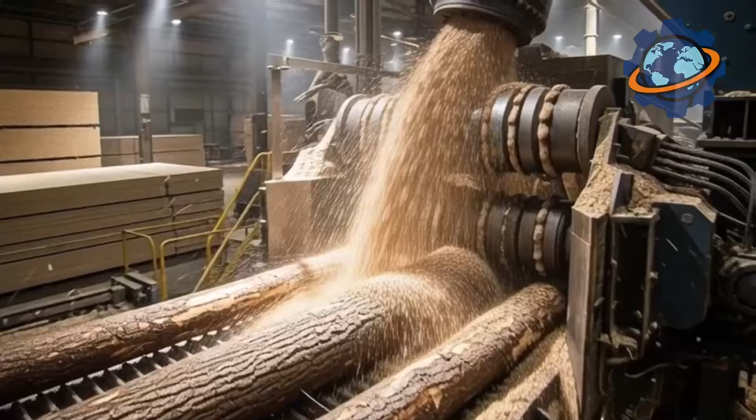Tear open your wall. Behind the drywall sits engineered wood, either plywood or OSB, oriented strand board. They look completely different yet serve an identical purpose. Plywood: smooth layers of thin wood stacked like pancakes. OSB: a chaotic jumble of wood strands compressed together.

North American construction consumes 30 billion square feet annually, enough to cover Rhode Island 50 times over. One panel costs $12. The house surrounding you required 300 panels minimum. How does a round tree trunk become a flat sheet stronger than solid wood? Why did ugly OSB nearly kill beautiful plywood?

Stay with us. You'll witness the violent beauty of spinning logs becoming continuous wood ribbons and discover the counterintuitive secret. Wood is stronger when you destroy its natural structure.

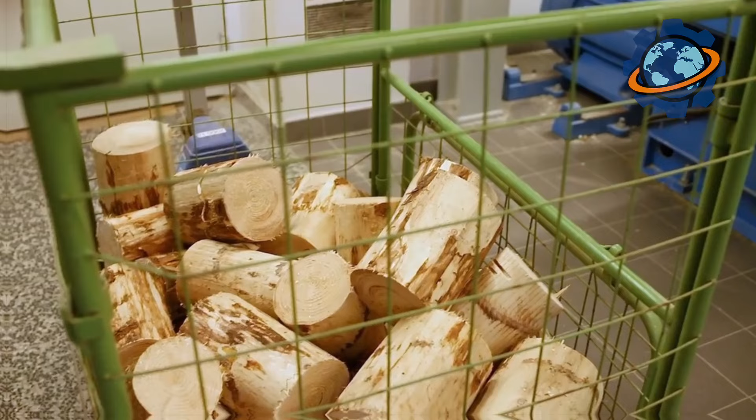The mill dominates the landscape, a facility processing 1 million board feet daily. Log trucks arrive continuously, each hauling 40 tons of Douglas fir or southern yellow pine. The debarking drum, 60 feet long and 10 feet in diameter, rotates like a giant clothes dryer. Logs tumble inside while high-pressure water jets at 3,000 psi blast bark away. The noise resembles a continuous explosion. Workers wear double hearing protection.

Watch the veneer lathe operation. A peeler lathe grips 8-foot logs at both ends, spinning them at 200 RPM while a knife blade, sharp as a surgical scalpel and wide as the log, shaves a continuous ribbon of wood. The veneer peels off like a paper towel unrolling, emerging as a sheet 1/8 inch thick and hundreds of feet long.

20 workers monitor 12 lathes simultaneously. One operator explains, "Log spins, knife stays still. Physics does the work. We just remove what breaks."

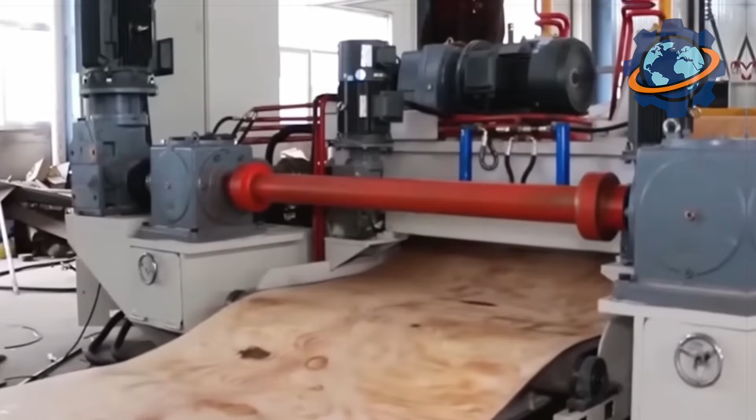The veneer ribbon, still damp from the tree's moisture, feeds through dryers, conveyor ovens stretching 300 feet. Temperature reaches 350 degrees, reducing moisture from 50% to 6% in 8 minutes. Dry too fast, the veneer cracks. Too slow, production bottlenecks. Sensors monitor moisture content constantly, adjusting heat and speed automatically.

After drying, veneer gets clipped into precise sheets, 4 feet by 8 feet, the industry standard. Automated clippers cut at speeds exceeding 1 sheet per second. The clipping produces massive waste. 30% of veneer becomes scraps. But nothing is wasted here. Those scraps feed directly to the OSB plant next door. The integration is complete. Plywood's waste becomes OSB's raw material. One tree enters, 2 products exit.

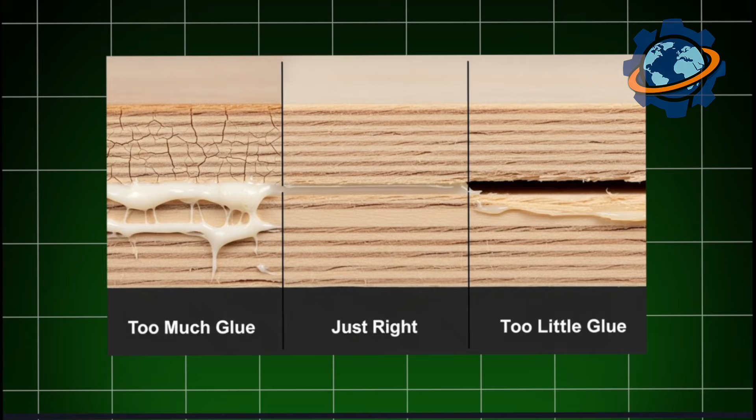Glue application transforms loose veneer into plywood through chemistry. Phenol formaldehyde resin, a waterproof adhesive surviving decades of weather exposure, gets sprayed onto veneer surfaces. The glue spreads microscopically thin, just 0.02 of an inch. Too much glue costs money and creates brittle joints. Too little, the plywood delaminates under stress.

The layup process stacks veneers perpendicular to each other, grain directions alternating 90 degrees between layers. This cross-grain construction is plywood's genius. Solid wood splits easily along the grain but resists splitting across the grain. By alternating grain directions, plywood eliminates directional weakness. A 5-ply panel, 5 layers total, achieves strength in all directions that solid wood can't match. The stacked sheets, still unbonded, go to the press.

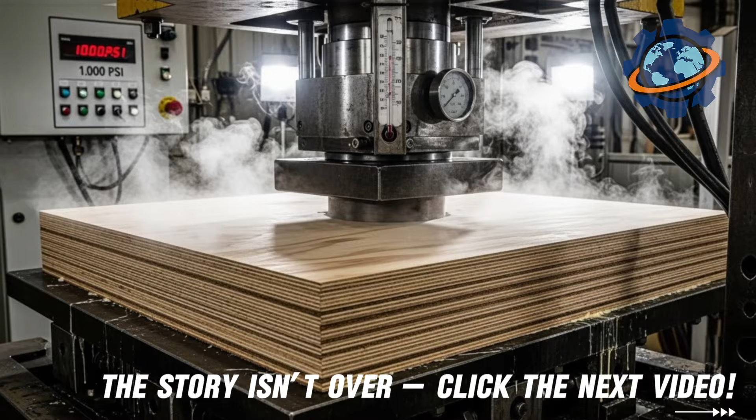The hot press is where plywood is born. A massive hydraulic press, 40 feet square, contains 30 openings stacked vertically. Each opening holds 20 plywood panels. Workers load 600 panels simultaneously, 12,000 square feet entering the press at once. The platens close, applying 1,000 psi pressure while heating to 290 degrees.

Under heat and pressure, the phenolic resin undergoes chemical cross-linking, molecular chains bonding permanently. The process is irreversible. Once cured, the glue can't melt again. Press time varies by thickness: 3 minutes for 1/4 inch, 12 minutes for 3/4 inch. When the press opens, steam erupts as residual moisture flashes. The panels emerge hot, rigid, transformed. What entered as loose layers exits as a single engineered unit, stronger than the tree it came from.

OSB manufacturing begins differently, with destruction. Instead of peeling veneer, trees get shredded. The strander machine uses a rotating disc containing hundreds of knives. Logs feed through, emerging as strands: thin rectangles 6 inches long, 1 inch wide, 0.025 inches thick. The violence is spectacular, logs disintegrating into thousands of pieces in seconds.

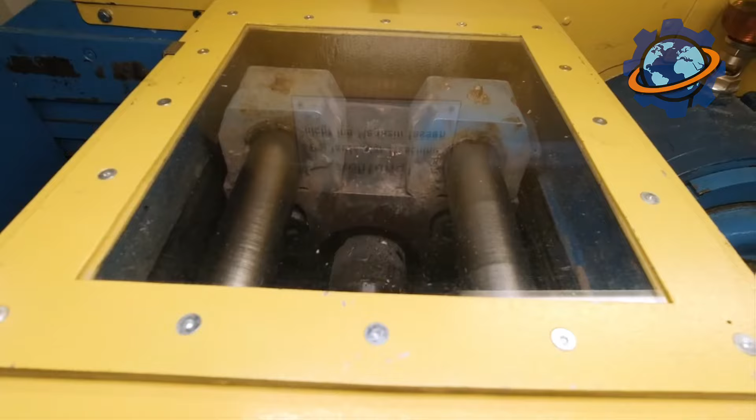These strands dry similarly to veneer but require less precision. Moisture content targets 8%. The dried strands get coated with wax and resin, different chemistry than plywood. OSB uses MDI, methylene diphenyl diisocyanate, bonding faster and cheaper than phenolic. The coated strands look like wood chips covered in syrup. They feed to forming stations where magic happens. Orientation.

Orientation differentiates OSB from random particle board. The forming line uses electrostatic alignment or mechanical orientation systems, forcing strands to lay parallel in outer layers, perpendicular in the core layer. This mimics plywood's cross-grain structure but achieves it through chaos rather than precision. Picture billions of wood strands, each finding its place in a three-dimensional puzzle.

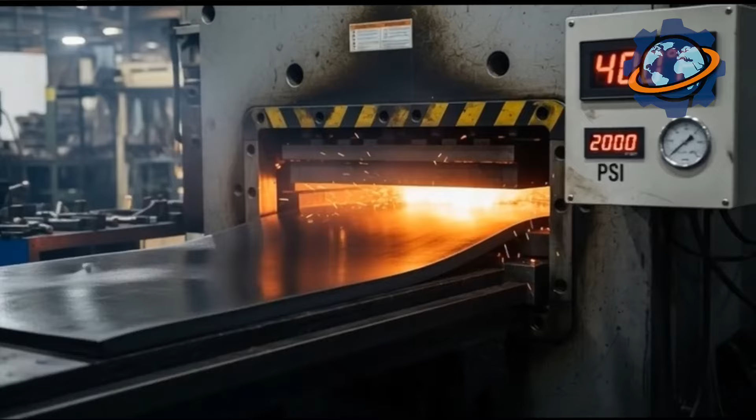The mat, a loose collection of oriented strands 8 inches thick, enters the continuous press. Unlike plywood's batch press, OSB uses a continuous process. The mat feeds into a press heated to 400 degrees under 2,000 psi pressure. As it travels through, thickness compresses from 8 inches to 7/16 inch while resin cures. The panel exits as a continuous ribbon, cut to length by flying saws. Production speed reaches 60 feet per minute, one 4x8 panel every 8 seconds.

Plywood originated in ancient Egypt. Archaeologists found plywood furniture in King Tutankhamun's tomb from 1300 BC. Modern plywood production began in 1865 when Immanuel Nobel, father of Alfred Nobel, developed rotary lathe cutting continuous veneer.

World War II accelerated development. Plywood construction enabled Mosquito bombers, proving engineered wood could replace scarce aluminum. OSB emerged in 1960s Canada as a solution to a log supply crisis. Small diameter trees and branches, unsuitable for veneer peeling, worked perfectly as strands.

Armin Elmendorf at Elmendorf Research created the first commercial OSB in 1978. Initially dismissed as a cheap substitute, OSB gradually proved equal or superior performance at lower cost. Today, OSB outsells plywood 3-to-1 in North American construction. The ugly duckling became the swan.

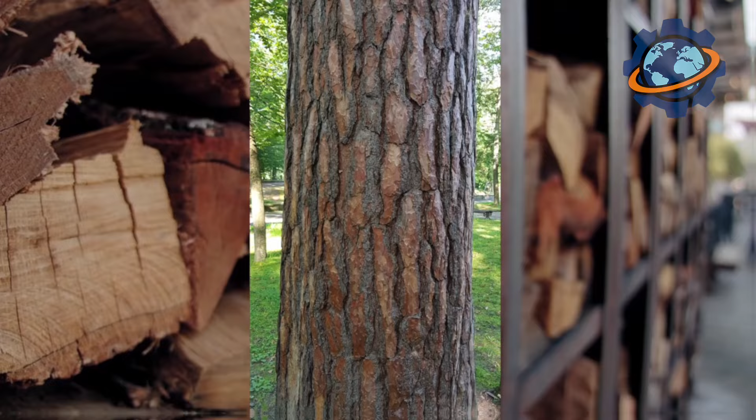Carbon emissions comparison favors engineered wood dramatically. Producing plywood or OSB generates 80% less CO2 than steel framing equivalents. Both products sequester carbon. The wood stores atmospheric CO2 for the building's lifetime. Industry plants 3 trees for every one harvested, making this a genuinely renewable material.

Here's the secret we promised. OSB dominates because it's democratized wood. Plywood requires perfect logs: large diameter, straight grain, minimal knots. Only 15% of logs qualify. OSB uses everything: crooked trees, small diameter, branches, plywood scraps.

The random strand orientation means defects disappear into the aggregate. That gnarly branch causing plywood failure becomes invisible in OSB's chaos. We learned that destroying wood's structure, cutting it into strands and reassembling randomly, creates a stronger, more consistent product than respecting its original form. From forest to framing, the cycle completes.

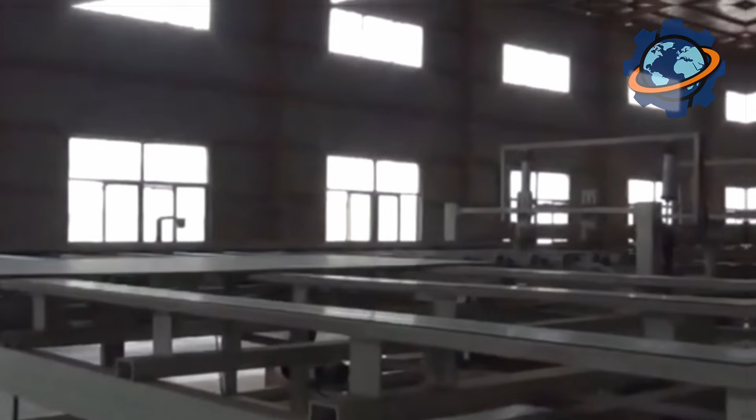We've engineered materials stronger than nature, provided by accepting that perfection comes through controlled destruction. That wall surrounding you isn't wood anymore, it's wood reimagined. It's fibers oriented and bonded beyond biological limits.

Plywood taught us to slice and stack. OSB taught us to shred and randomize. Both taught us that human engineering can improve on millions of years of evolution when we stop trying to preserve what nature made and start rebuilding it our way.

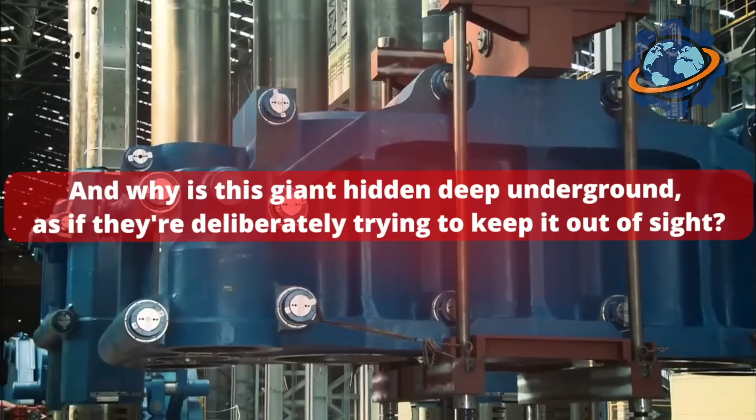A machine capable of squeezing metal like it's alive, not melting it, not breaking it, but forcing it to flow under pressure that's impossible to imagine. 80,000 tons of force concentrated at a single point. That's more than the weight of an entire army of tanks stacked on top of each other. But why does humanity need such inhumane power? And why is this giant hidden deep underground, as if they're deliberately trying to keep it out of sight?

Under this press, they're not just making metal parts, they're forming the heart of airplanes, rockets, and reactors without a single welded seam. But there's one fact almost never discussed publicly. If you watch till the end, you'll understand why this press isn't an engineering marvel, but a tool of global dominance.

How much is 80,000 tons? Just to put that in perspective, that's the equivalent weight of 80,000 cars compressed into a single point, or the pressure created by an entire army of giant elephants stacked on top of each other. This metal colossus, installed in 2013, is the world's most powerful forging press, surpassing all previous achievements.

It's a true giant, reaching the height of a 10-story building. Its foundation is buried deep in the ground, while its upper section rises into the sky like an industrial skyscraper. It looks like a machine from a science fiction movie, but it's absolutely real and performs its incredible work every single day.

This press is designed for stamping extraordinarily large and complex parts that are critically important for the aviation, aerospace, and energy industries. These can be massive panels for rocket bodies, huge wing or fuselage components for aircraft, turbine parts for power plants, or even reactor equipment.

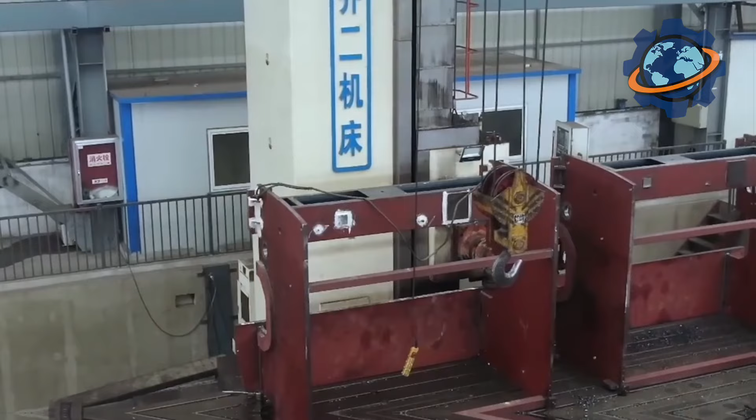The story of these giant presses is its own epic saga, deeply intertwined with the Cold War era. Back when the USA and USSR were competing for dominance in the space race and military industry, there arose a need for super strong, seamless metal structures. The Americans were first to build presses with a capacity of 50,000 tons, allowing them to create large aircraft components without welds, drastically improving reliability.

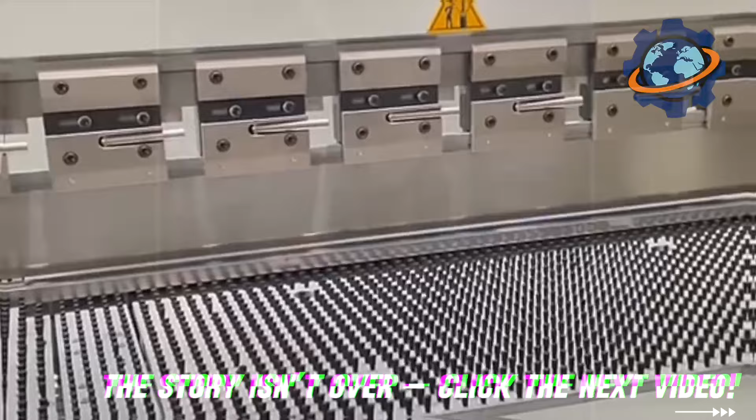The Soviet Union wasted no time responding, creating an even more powerful 75,000-ton press that also became a legend of engineering ingenuity. These titans of their time represented the pinnacle of metallurgical technology, symbols of engineering superiority and the industrial might of superpowers. They were true monsters, capable of shaping metal with such force it seemed almost impossible.

But this modern Chinese press shattered all those records, surpassing even the Soviet giant. It can crush metal with literally superhuman force. Under this press, red-hot metal blanks weighing hundreds of tons, that's like dozens of trucks compressed into a single chunk of metal, get flattened like soft clay. Metal heated to a red or yellow glow undergoes incredible pressure. It doesn't just deform, it flows under this colossal force, slowly but relentlessly taking on the required pre-designed shape.

This isn't casting, this is forging, a process that strengthens the metal structure, making it denser and stronger than any cast piece. This ability to produce solid forgings of enormous size is the main advantage and defining characteristic of such presses. Picture this. You can get a massive spar for an aircraft wing or a reactor vessel component without a single weld.

Weld seams, no matter how high quality they are, will always be potential weak points in metal structures. They can be sites of stress concentration, cracks, or corrosion. In mission-critical components, where the cost of failure can be catastrophic, say in an aircraft at 33,000 feet, or in a space rocket, the absence of weld seams isn't just desirable, it's absolutely essential. Solid forgings, formed under such pressure, have unmatched strength, uniform structure, and maximum reliability. They're the foundation for building supersonic aircraft, ultra-powerful rockets, spacecraft, and safe nuclear reactors.

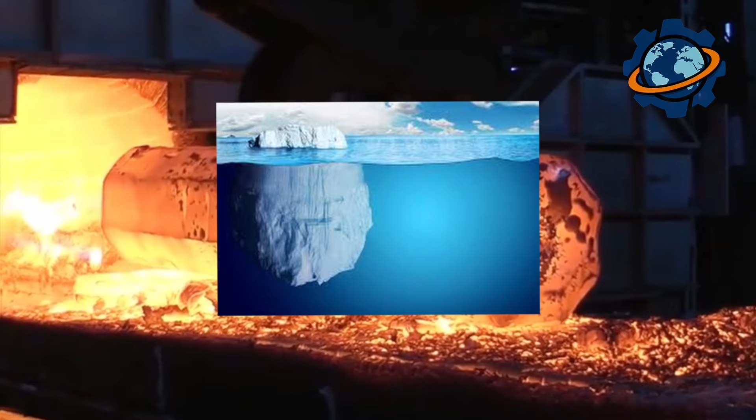To install a press of this magnitude, you don't just build a foundation, you build an entire underground iceberg. The main structure of the press is buried deep in the earth because the enormous forces acting during forging create incredible vibrations that need to be absorbed. It's like building a foundation for a skyscraper, but in reverse, plunging into the depths of the earth for dozens of feet. Installing equipment like this is a more complex logistical operation than launching a space rocket. Press components arrive on site by the hundreds, then get assembled using giant cranes and engineering teams working for years.

By the way, an 80,000-ton press force isn't just pressure, it's a controlled transformation of material at the micro level. Under that kind of force, the metal's crystalline structure changes. Grains become finer and denser, giving it exceptional mechanical properties. It's like leveling up metal to maximum stats.

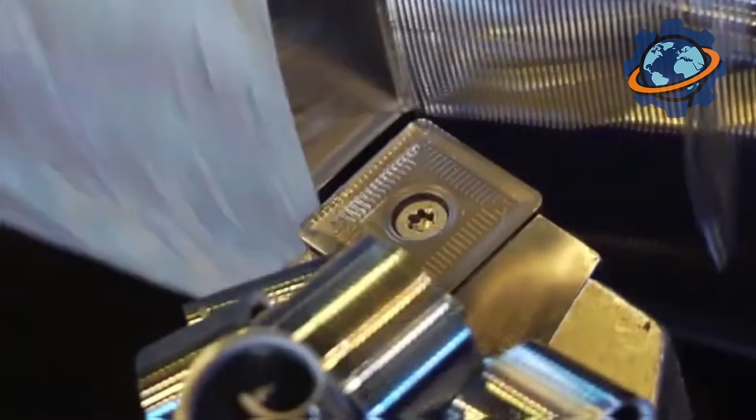Here's another thing. Running a giant like this takes a colossal amount of energy. This isn't just plug it into an outlet. Powering the hydraulic pumps and maintaining stable pressure requires a dedicated power plant. And the cooling systems that carry heat away from the hydraulic fluid, just as critical. Under these loads, the oil can get seriously hot. It's a true engineering ecosystem where every single component is mission critical for the entire complex to function.

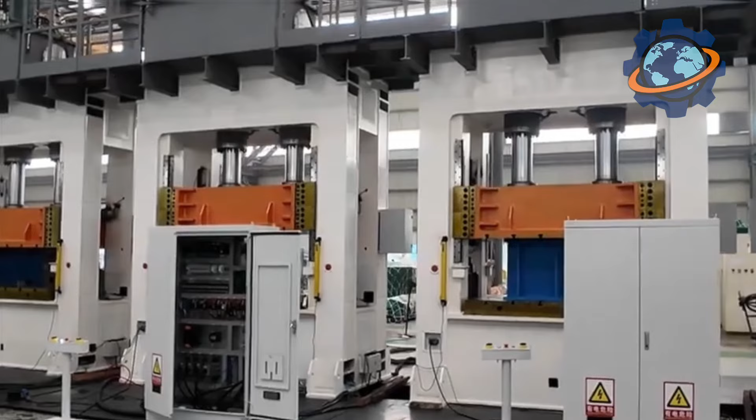As we mentioned, instead of welding together dozens of small metal sheets, the press can forge a significant portion of the shell from a single block of metal. This makes the structure lighter, stronger, and far more resistant to fatigue. While the press doesn't stamp out tiny turbine blades, it can form large casing components for jet engines, parts that withstand extreme pressure and temperature.

Beyond aerospace, where every single pound and every hairline crack can spell disaster, this press also stamps out components for nuclear and thermal power plants. We're talking ultra-high-strength reactor housings and lids, turbine elements, generators, and other equipment operating under extreme pressure, temperature, and radiation. Here, integrity and zero defects aren't just about efficiency, they're about protecting entire regions.

They also forge shafts and rotors for massive ships and industrial machinery. Enormous turbine installations on ocean-going vessels or in power generation require ultra-strong shafts that can handle colossal rotational forces and torsional loads. Forgings made under this press are perfectly suited for these purposes.

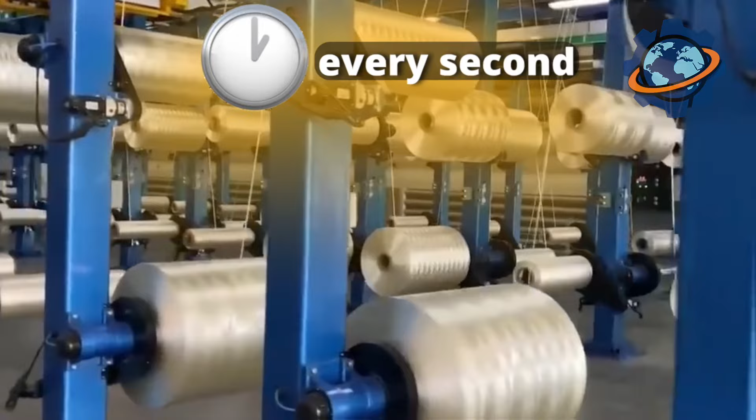Every second, factories worldwide produce carbon fiber threads 10 times stronger than steel, yet 5 times lighter. Picture this. A strand thinner than human hair supports weights exceeding 400 pounds, more than 2 adult humans hanging from a thread, invisible at arm's length. These black filaments, woven into composites, form radar-invisible bombers, Formula One monocoques surviving 200-mile-per-hour crashes, and prosthetic limbs outperforming natural bone. How does ordinary plastic transform into material stronger than steel through fire?

Why do engineers call carbon fiber the black aluminum, revolutionizing everything from spacecraft to tennis rackets? Stick around till the end. You'll discover the jaw-dropping reason carbon fiber doesn't break like metal but unravels like fabric, why recycling it became a technological arms race, and the shocking truth about what happens inside furnaces hotter than volcanic lava when atoms reorganize into crystalline perfection. The story begins with polyacrylonitrile, PAN fiber, the plastic precursor looking like white cotton thread.

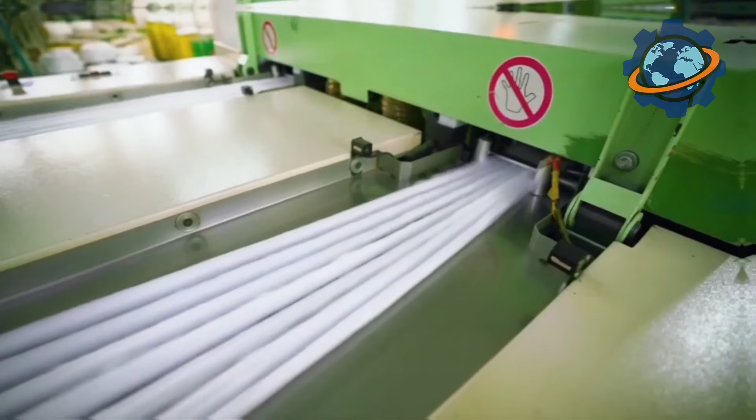Massive spinning machines standing 3 stories tall in climate-controlled facilities extrude molten PAN through spinnerets containing 50,000 microscopic holes. Each hole, measuring 3/10,000ths of an inch across, thinner than blood cells, produces one continuous filament. Picture spider silk production scaled to industrial extremes. These filaments emerge at speeds reaching 3,000 feet per minute, fast enough to cross football fields in seconds.

Chemical baths stretch the fibers, aligning polymer chains parallel to fiber length. This molecular orientation determines everything. Randomly oriented polymers create weak thread. Aligned chains create strength rivaling steel. Workers monitor tension constantly. Variations of 2% cause inconsistent properties requiring entire batches, thousands of pounds worth, to be scrapped. The PAN production facility operates 24/7, producing 50 tons daily, enough fiber to circle Earth's equator if laid end to end.

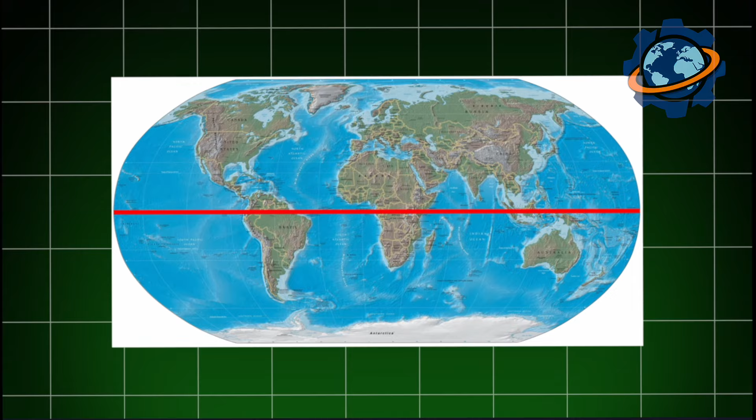Next comes oxidation, the first transformation where chemistry becomes alchemy. Massive ovens, stretching 200 feet long like horizontal tunnels, heat PAN fibers to 500 degrees Fahrenheit in pure oxygen atmosphere. Inside these furnaces, oxygen atoms attack carbon-hydrogen bonds in the polymer backbone. Hydrogen burns away as water vapor, leaving behind carbon-nitrogen ladder structures stabilized through cross-linking.

This stabilization process takes 90 minutes as fibers crawl through ovens on tensioned rollers. Temperature control matters critically. Too hot, fibers ignite catastrophically. Too cold, cross-linking remains incomplete, causing failure during subsequent heating. The oxidation chamber maintains oxygen concentration at 23% with tolerance of 0.5%.

Operators monitor fiber color constantly, watching white PAN transform through yellow to dark brown. That color change represents chemical metamorphosis, polymer becoming something fundamentally different, no longer meltable, now heat-resistant enough to survive temperatures that vaporize aluminum.

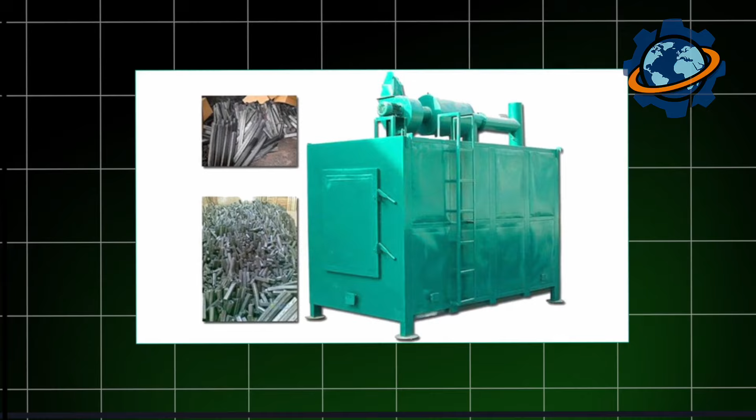Giant carbonization furnaces, operating at temperatures exceeding 3,000 degrees Fahrenheit, complete the transformation. These aren't ordinary ovens, they're inert atmosphere chambers purged with nitrogen gas, creating environments where oxygen molecules cannot exist. Inside this oxygen-free inferno, stabilized fibers lose nitrogen, hydrogen, and other non-carbon elements through thermal decomposition. Only carbon remains, reorganizing into graphite-like crystalline structures.

The process occurs in stages. First, furnaces heat fibers to 2,700 degrees, driving off 90% of non-carbon atoms. The fiber shrinks 25%, density increasing as material compacts. Second stage furnaces push temperatures to 4,000 degrees for graphitization, the process aligning carbon atoms into perfect hexagonal sheets stacked like microscopic playing cards. This crystalline perfection gives carbon fiber its extraordinary properties.

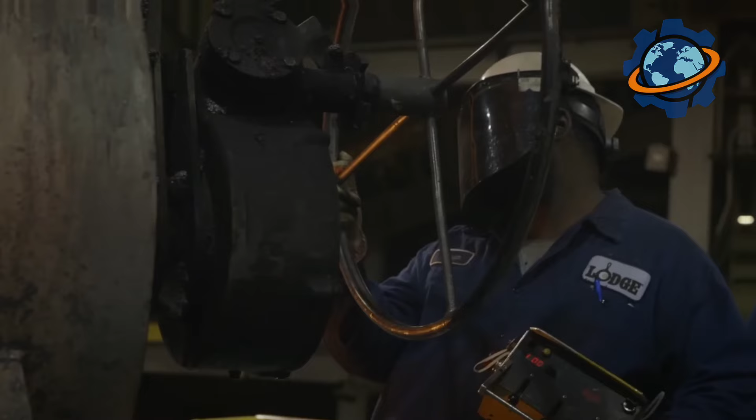Processing takes 3 hours, crawling through furnace sections totaling 1,000 feet long. One power interruption, one oxygen leak, and fibers oxidize catastrophically, burning like magnesium flares, destroying millions in equipment.

Now comes surface treatment, electrolytic oxidation creating reactive sites for resin bonding. The carbon fiber, now black as obsidian and measuring just 0.0003 inches diameter, passes through electrolyte baths while electric current flows through it. This electrochemical attack roughens the fiber surface at nanometer scale, creating anchor points where epoxy resins chemically bond.

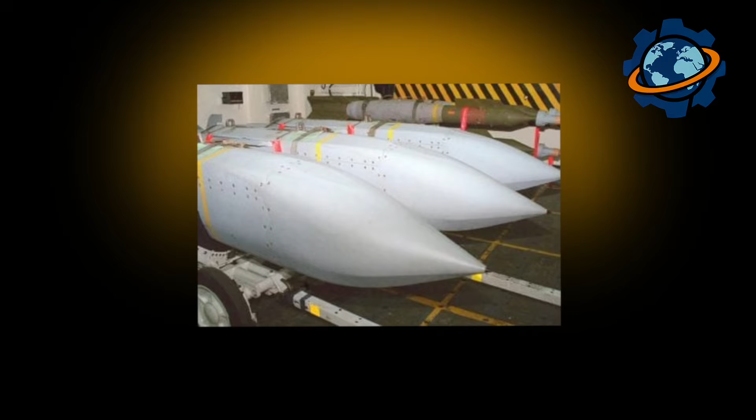Picture this: untreated carbon fiber in epoxy resin slides apart like oiled rope, strong individually but weak as composite. Surface-treated fiber bonds molecularly to resin, creating integrated structure where fiber and matrix function as single material. Modern aerospace composites achieve interface strengths exceeding 12,000 pounds per square inch, meaning the bond between fiber and resin is stronger than many metals themselves.

This step is critical because composite strength depends not just on fiber properties, but on load transfer efficiency from matrix to fiber. Poor surface treatment causes delamination, layers separating under stress, the characteristic failure mode making carbon composites unravel rather than fracture.

The sizing application follows, coating fibers with protective polymer layer. Massive rollers submerge fiber tows, bundles containing 12,000 individual filaments, through sizing baths containing proprietary polymer formulations. This coating serves triple purpose: protects fibers during handling, improves resin wetting during composite layup, and provides limited abrasion resistance.

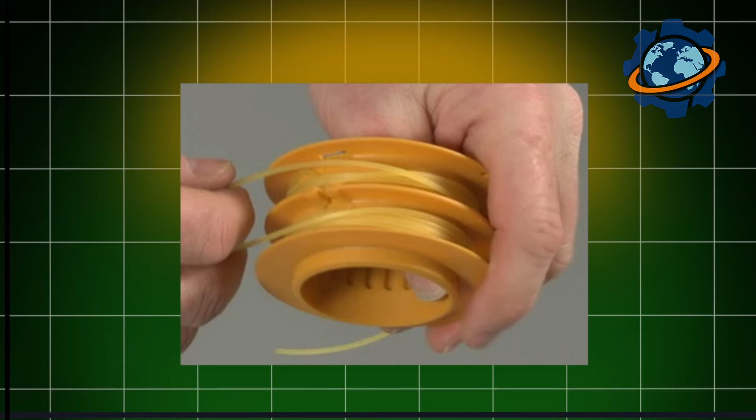Workers wind treated fiber onto spools holding 10 miles of continuous filament. These spools, weighing 200 pounds each, ship to composite manufacturers worldwide. Quality control inspects random samples continuously. Tensile testing machines pull individual fibers until failure, measuring breaking strength, elastic modulus, and elongation.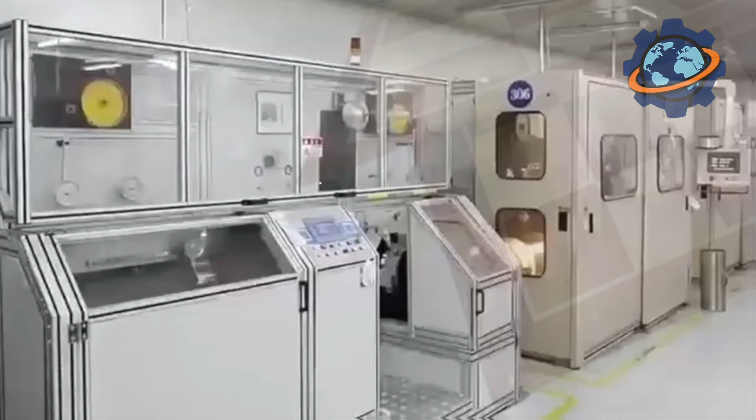After arriving at composite manufacturers, fibers get woven into fabrics or used as unidirectional tapes. Automated looms, programmed like textile machines but operating at glacial speeds to prevent fiber damage, weave intricate patterns. Plain weave creates checkerboard appearance, twill weave produces diagonal patterns, satin weave maximizes smoothness for aerodynamic surfaces. Each weave pattern offers different mechanical properties. Engineers select patterns matching stress directions.

Picture this. Laying up carbon composite resembles origami, with materials costing $300 per pound. Technicians cut fabric patterns, stacking layers in precise orientations. Each ply orientation, 0 degrees, 45 degrees, 90 degrees, contributes specific strength characteristics. A typical aerospace laminate contains 40 plies, each 0.005 inches thick, creating structures 0.2 inches thick, yet lighter than equivalent aluminum.

Between each ply, workers brush epoxy resin, ensuring complete fiber wetting. Air bubbles trapped between layers become stress concentrators, causing catastrophic failure. So layup occurs in clean rooms, maintaining air purity rivaling semiconductor fabs.

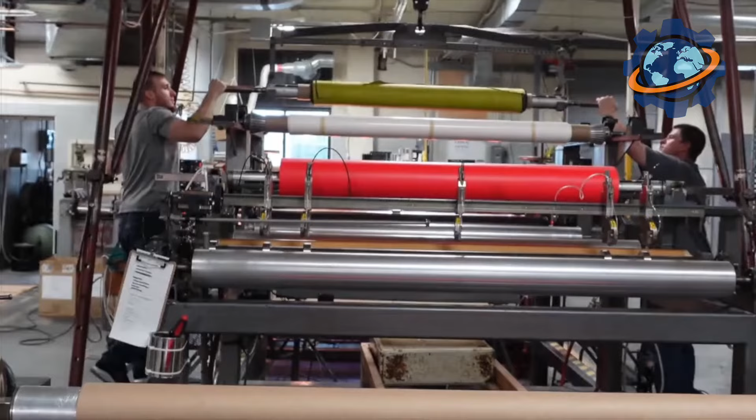Curing transforms wet layup into solid composite through heat and pressure. Massive autoclaves, pressure vessels 30 feet in diameter and 100 feet long, create environments combining 300 degrees Fahrenheit and 100 psi pressure. Inside these industrial pressure cookers, epoxy resin chemically cross-links while pressure squeezes out excess resin and air voids, compacting layers into dense laminates.

The cure cycle takes 8 hours following computer-controlled temperature and pressure ramps. Heat too fast, resin boils, creating voids. Heat too slow, productivity plummets. Modern autoclaves monitor 200 sensors simultaneously, adjusting conditions to within 1 degree and 0.5 psi. After curing, parts exit as rigid structures, material properties now locked permanently.

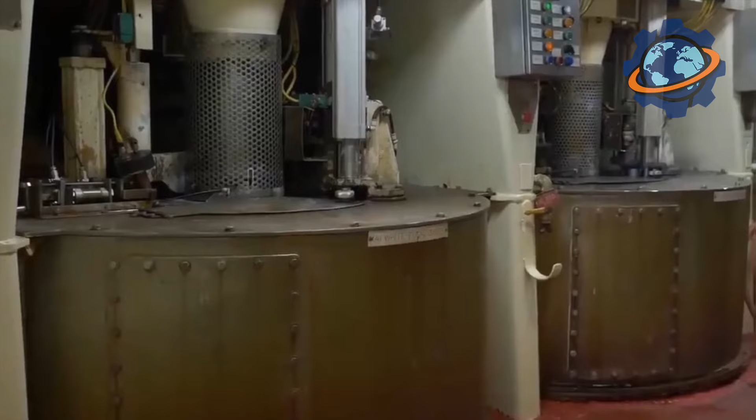Non-destructive testing using ultrasound and X-rays searches for defects. Even microscopic voids or delaminations require part rejection because carbon composites tolerate zero defects. Unlike metals tolerating small cracks through ductility, carbon composites fail catastrophically once cracks initiate. That brittleness demands perfection during manufacturing.

This technology emerged from the 1960s space race. Thomas Edison experimented with carbon filaments in the 1880s for light bulbs. But modern carbon fiber originated when British researcher William Watt developed the PAN-based process in 1963 at the Royal Aircraft Establishment. The breakthrough made high-strength fibers commercially viable.

Formula One adopted carbon fiber in 1981 when McLaren built the first composite monocoque chassis. Driver John Watson walked away from a 200-mile-per-hour crash at Monza, the carbon tub protecting him despite complete car disintegration. That demonstration convinced the aerospace industry. Boeing's 787 Dreamliner, entering service in 2011, uses 50% composite materials by weight. Wings, fuselage sections, tail, slashing fuel consumption 20% versus aluminum equivalents.

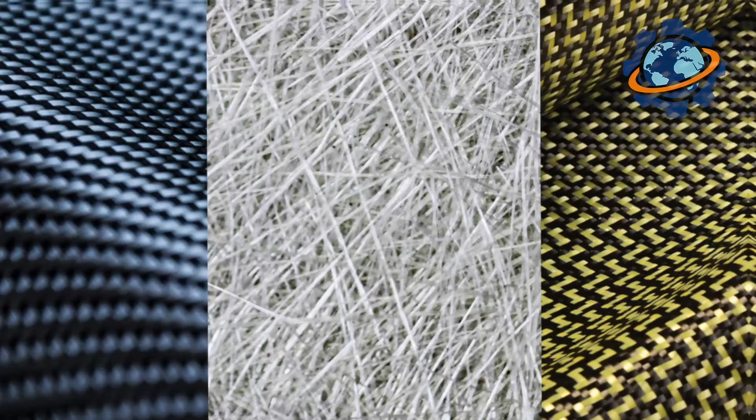The B-2 Spirit stealth bomber, revealed in 1989, incorporates carbon composites extensively. The radar-transparent properties, combined with geometric shaping, create aircraft virtually invisible to detection. Today, carbon fiber production exceeds 120,000 tons annually, growing 15% yearly as industries discover applications from wind turbine blades to bicycle frames. Carbon emissions drop by 32% when using carbon fiber in aircraft versus aluminum.

Lighter structures require less fuel over millions of flight miles. Industry saves over $68 billion annually through weight reduction in transportation. Wind turbines using carbon fiber blades generate 18% more electricity through longer, lighter blades, impossible with fiberglass. So here's the secret promised.

Carbon fiber doesn't break, it delaminates. Unlike metal fracturing through crack propagation, carbon composites fail through layer separation. Impact damage creates barely visible surface dimples, hiding extensive internal delamination, so composites require ultrasonic inspection after any impact. That failure mode makes recycling challenging. You can't melt carbon fiber like aluminum. Heating destroys the crystalline structure that provides strength.

Current recycling uses pyrolysis, heating composites to 1,000 degrees in oxygen-free environments, burning away resin while preserving fibers. Recovered fibers retain 70% of original strength, creating secondary markets. From plastic thread to aerospace revolution, the cycle completes. Carbon fiber represents humanity's ability to reorganize matter at the atomic level, creating materials nature never intended.

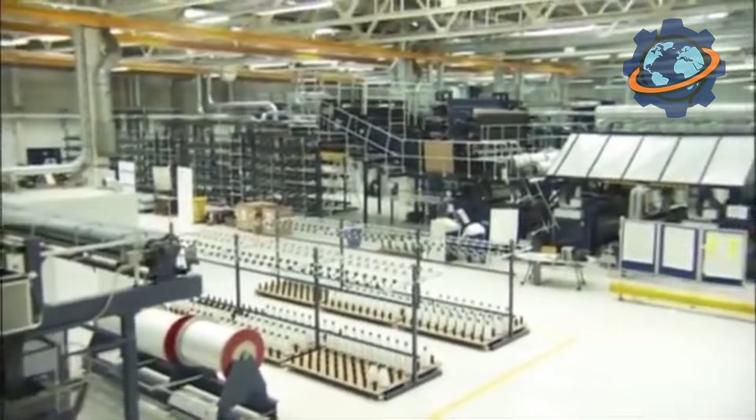We've learned to cook polymers in furnaces hotter than volcanoes, aligning carbon atoms into crystalline perfection, stronger than any metal, yet lighter than aluminum. That thread, thinner than hair, doesn't just reduce weight. It enables impossible structures. Aircraft wings spanning 200 feet without internal support. Prosthetics stronger than bone. Spacecraft components surviving forces that pulverize steel. We've engineered the future, one microscopic fiber at a time.

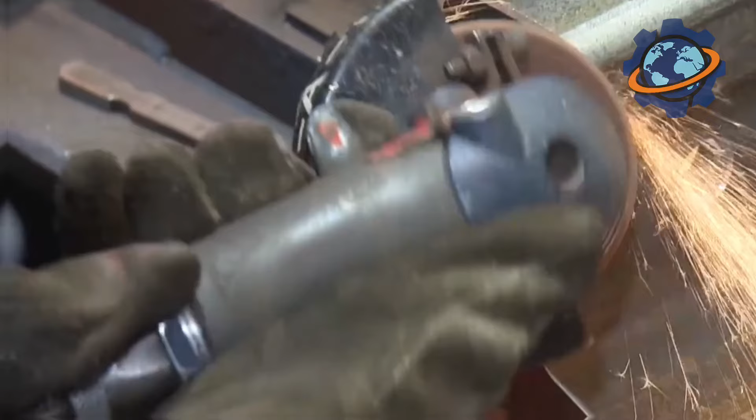Every year, over 100,000 kilometers of new rails are laid across the planet. And every single one of them goes through hell first. Fire over 1,500 degrees, the crushing force of rollers, and jets of water that cut metal like glass. From scrap heap to gleaming steel, a rail's journey is like an initiation, where every step decides whether it survives or shatters under the first train.

But what makes this steel so perfect that it can handle thousands of tons of pressure every day without bending or cracking? Stick around, and you'll see how the arteries that move the entire world are born. First, you gotta make the steel. A mix of scrap metal, iron ore, coke, and limestone gets dumped into the furnace, the raw ingredients for a future rail. The temperature in the blast furnace hits over 2,700 degrees Fahrenheit. That's 1,500 Celsius. Under that hellish heat, the metal turns liquid, glowing like the sun.

Workers keep a close eye on the composition. Even an extra 0.1% of carbon can make the rail too brittle or too soft. After melting, the molten steel is poured into molds, metal forms that create rectangular blocks called ingots or slabs. They don't look like a rail yet, just solid bars a few meters long and over a foot wide. After pouring, each blank is cooled, but not completely. It's kept warm to reduce stress during the rolling process.

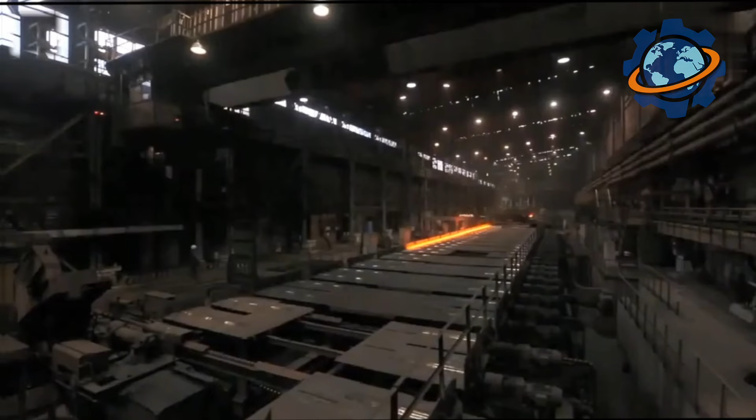This stage is the foundation for everything. If the steel comes out bad, even a perfect rolling job won't save it. So quality control here is almost a ritual. Chemists check the composition, metallurgists monitor the temperature, and automatic sensors track the cooling uniformity. Only when every single parameter is locked in does the blank move on into the fiery heart of the rolling mill.

In the rolling mill, massive billets, up to 20 meters long, are heated in furnaces to over 2,200 degrees Fahrenheit, 1,200 Celsius. The metal becomes pliable, like dough, but keeps its density and strength. The hot blank is immediately fed into reversing rolling stands. These are huge machines with heavy rollers. It passes through them several times, first to reduce its thickness, then to give it the right shape.

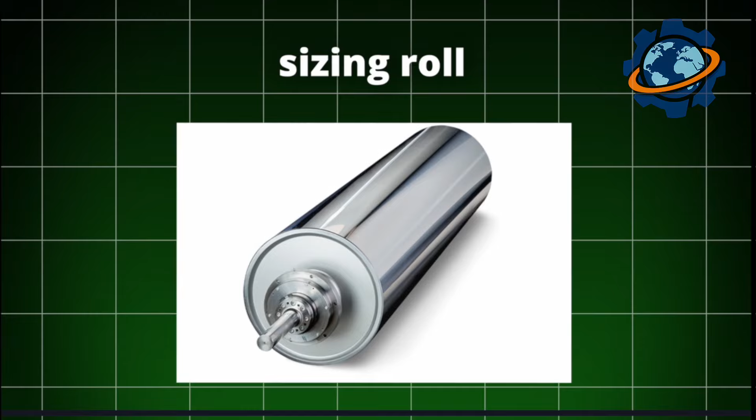Each pass is a squeeze and stretch, gradually transforming the metal from a simple billet into a future rail with its complex profile: the head, the web, and the foot. To get the exact geometry, they use a final sizing roll. It's like the final polish of the shape, with tolerances on this step not exceeding 0.3 of a millimeter.

Right after rolling, while the rails are still hot, they go through a cooling process. They're either evenly blasted with air or left to cool on an open rack. It's crucial that the cooling is symmetrical. Otherwise, the metal could warp.

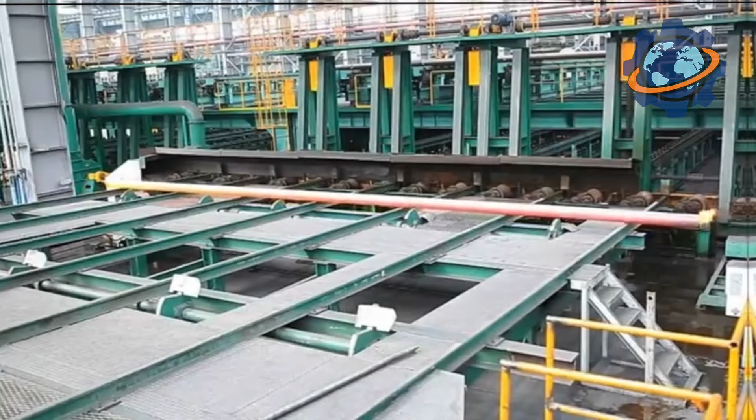To ensure a smooth, bump-free ride at high speed, individual rails are welded into long sections, up to 400 meters without a single joint. The main method is thermite welding. In a special mold between two rails, a gap of a few millimeters is left. A molten steel mixture, created by the reaction of powdered aluminum with iron oxide, is poured in.

The temperature hits a scorching 4,500 degrees Fahrenheit, 2,500 Celsius. This molten metal flows into both parts of the rail and fills the joint area. When it solidifies, it creates a monolithic bond, stronger than the rail itself. After that, the excess metal is trimmed off, and the weld is ground down to a perfectly smooth level, without a single bump. Every joint is inspected, with ultrasound or eddy currents, to make sure there are no hidden microcracks.

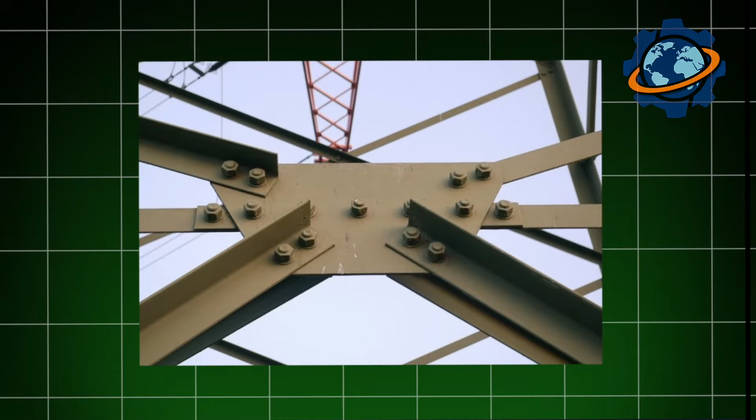These long rails are easier to transport than you'd think. They're either wound onto special drums or carried on platforms with pivoting supports. And on the construction site, the sections are joined again, this time by welding or using special bolted joints. The result is a continuous rail line that stretches for kilometers without a single click. The same silent glide we've come to expect on high-speed trains.

But first, after rolling and welding, the rails are still alive. There's stress left inside the metal, and the grain structure needs to be stabilized. This is where heat treatment comes in, giving the rail its strength, wear resistance, and durability. And it looks almost like a metallurgical spa session. The rail is rapidly heated to high temperatures, around 1800 degrees Fahrenheit, 1000 Celsius. This is done in furnaces, tens of meters long, where the temperature is controlled to the degree.

At this heat, the steel's crystal lattice shifts into a new state, austenite. But the main event starts after that. The rail is instantly cooled. Jets of high-pressure water are aimed along the head and web, the very parts the wheel rolls on. The temperature drops in a flash, and a new structure forms in the metal, martensite, an extremely hard, wear-resistant phase.

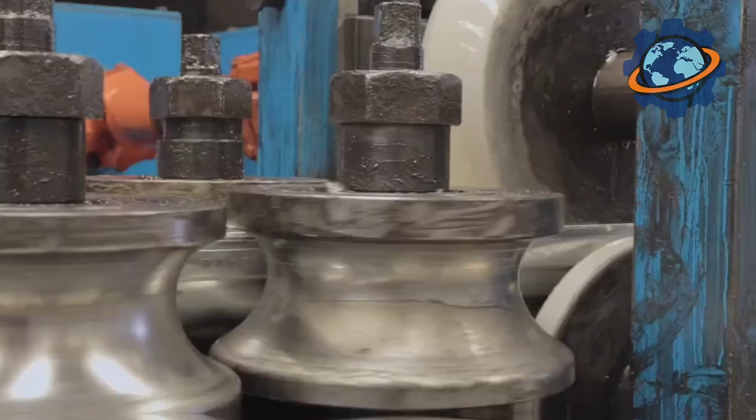But to avoid brittleness, the rail is slowly heated and cooled one more time. This balances the structure, relieves any extra internal stress, and ensures the rail can handle frost, heat, and thousands of trains a day. In the end, the metal holds its shape and withstands pressures of tens of tons per square inch without deforming.

Before a rail hits the road, it goes through a whole series of tough tests, like it's trying to join an army of high-speed transport. In special labs, it's checked for strength, hardness, geometry, and internal defects. First up, ultrasonic testing. High-frequency waves are sent into the rail. If there's a microcrack or void inside, the signal bounces back and flags the problem.

Then, hardness measurements along its entire length to make sure the heat treatment was uniform. At the same time, its straightness and profile are checked. Laser sensors scan every inch, detecting even tiny warps that could cause vibration or wear. And finally, bend and impact tests. A piece of the rail is loaded with pressure dozens of times greater than the weight of a train to make sure it can handle any challenge on the route.

When the rail has successfully passed all the tests, it's time for its most important journey, to the installation site. But how do you transport giant metal strips over 90 meters long? Regular trucks can't handle it. Here, they use special railway platforms with curved supports that reduce stress and prevent the rail from sagging or vibrating during transit. Sometimes, rails are transported already welded into even longer sections, from 400 to 600 meters.

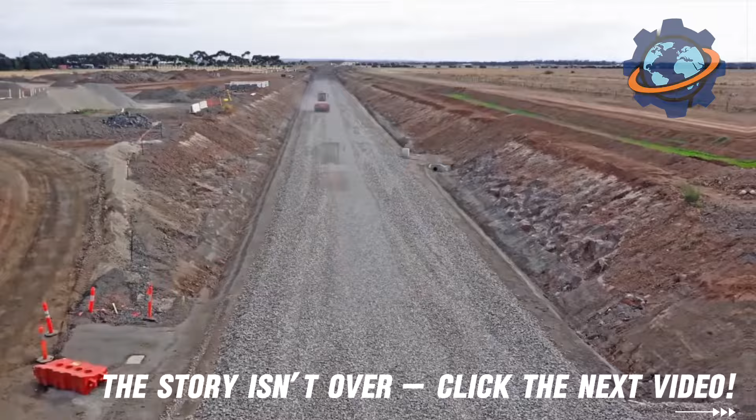Before installation, the rails are heated or cooled depending on the ambient temperature. This is to compensate for the thermal expansion and contraction of the metal. Otherwise, it would buckle in the heat or gaps would form in the cold. In practice, each rail is laid with these physical changes in mind, usually at a stress-free temperature point.

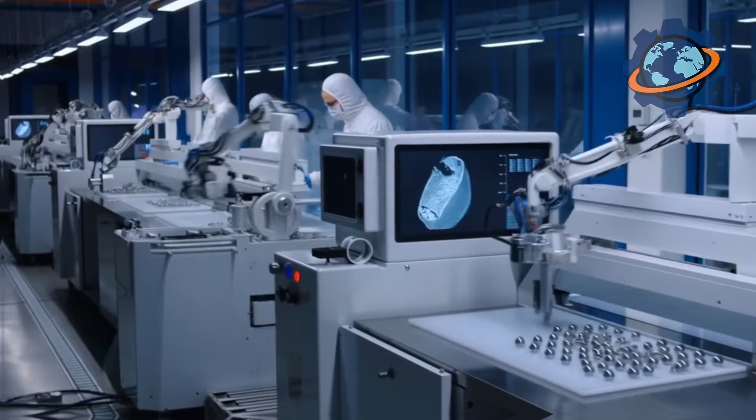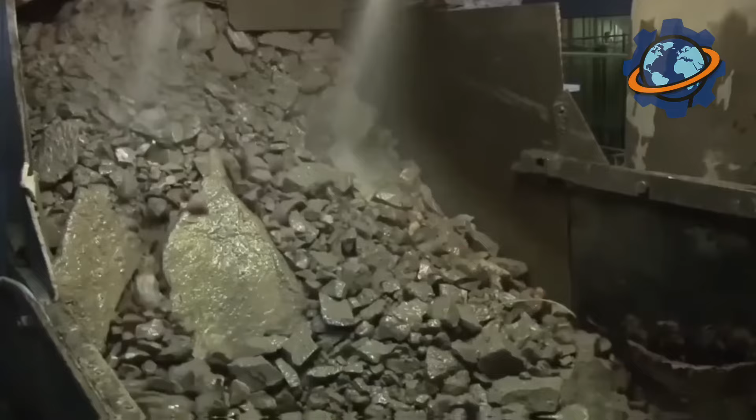When a fuel assembly has served its 4 or 6 years in the heart of a reactor, it's no longer the shiny star it was at launch. It's removed, carefully by a robotic system, and moved into pools of water. The depth is over 20 feet. The water cools it and shields the radiation because the fuel is still hot, both physically and radioactively. There it rests for several years.

Next, the pellets are sintered in furnaces at almost 3,000 degrees to make them as strong as porcelain. Then they're polished and ground. Perfect dimensions are crucial for a tight fit inside the cladding. The pellets are loaded into long metal tubes. Fuel rods, usually made of a zirconium alloy because it doesn't rust, doesn't react with water, and can withstand insane radiation. Each rod holds over 300 pellets.

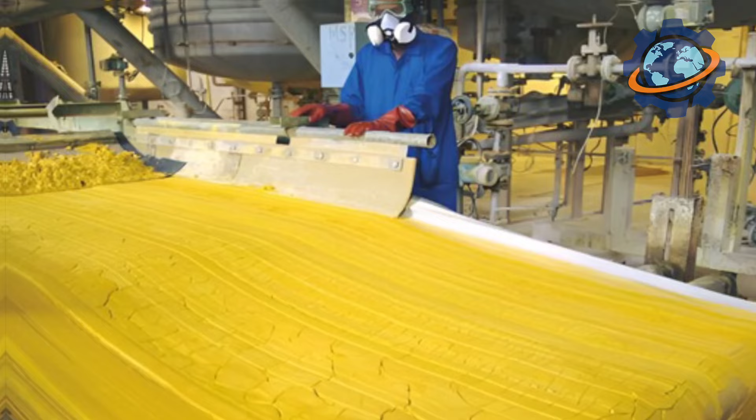The rods are hermetically welded shut and bundled into modules, fuel assemblies. They look like a frame of several dozen tubes gathered into a square. One such assembly can weigh over 1,500 pounds and works for up to 6 years in a reactor. After assembly comes testing for leaks, uniform filling, weld integrity, and behavior under temperature. There are no small details, because any one of them could cost not just money, but lives. The finished fuel is packed into armored containers that can withstand impacts, fires, and falls from a height.

But one centrifuge isn't enough, so they're connected in cascades of hundreds, sometimes thousands. Each one slightly enriches the gas, then passes it to the next. And so it goes, cycle after cycle, until the U-235 content reaches at least 3 or 5%. That's the reactor-grade standard. For weapons, of course, they follow entirely different routes, which are classified and under strict international control.

Okay, the gas is enriched, but you can't feed a reactor with a gas. So now it's converted again, this time into a solid ceramic form. After a series of chemical reactions with hydrogen, oxygen, and ammonia, the gas becomes uranium dioxide, a solid substance with a dark gray color. This powder is pressed under 20 tons of pressure into small cylindrical pellets, 3/10 of an inch in diameter. They look almost cute. But each of these little pills holds an energy equivalent to 17,000 cubic feet of natural gas.

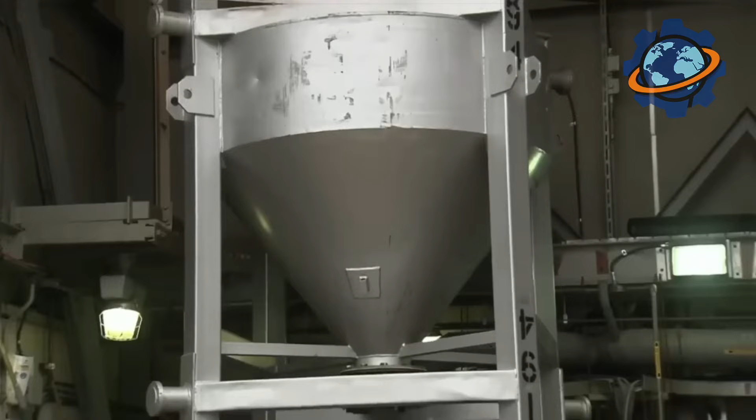And so, mission accomplished. The dust has been turned into a gas, ready for the most interesting part, isotope enrichment. But don't get too excited yet. This gas is like a wild cobra. Beautiful, shiny, but if it bites, no one can save you. You think a washing machine spins fast? You haven't seen nuclear centrifuges that do 70,000 revs a minute. That's 10 times faster than a jet engine turbine. And all for one thing: to separate uranium isotopes.

Uranium hexafluoride, that same toxic gas we just made, is pumped into a tall, narrow cylindrical chamber, which is spun up to an insane speed. Centrifugal force does its thing. The heavier U-238 atoms are flung to the edge, while the lighter U-235 atoms stay closer to the center. A tiny microscopic difference, 1% in mass, and all this expensive technology spins just for that.

That means you just need to heat it a little, and it turns from crystals into vapor. But it's not that simple. It's extremely toxic. It corrodes metals, destroys skin, and in moist air, it instantly turns into hydrogen fluoride and uranyl fluoride, basically a deadly cocktail. That's why this is all done in sealed, automated reactors that look more like devices from an evil genius's lab.

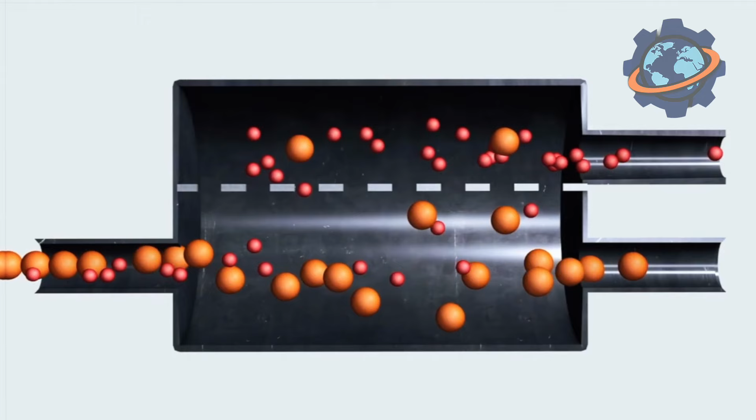Temperature, pressure, ventilation, everything is under control. Workers sit behind thick windows, watching the gauges. Any mistake, boom or hiss, and you're in a hazmat suit scrambling for the decontamination shower. This substance forms as solid whitish crystals when cooled to room temperature. These crystals are stored in steel containers, drums with engravings, batch numbers, and a radioactive sign. Each one weighs up to 14 tons.

Yellowcake is packed into double-walled drums, loaded onto escorted trailers, plastered with radiation signs, and off it goes to an enrichment plant. It's from this toxic dust that the journey begins, the one that leads to the white light of a lamp over your kitchen table, or the electricity in the subway hurtling beneath New York.

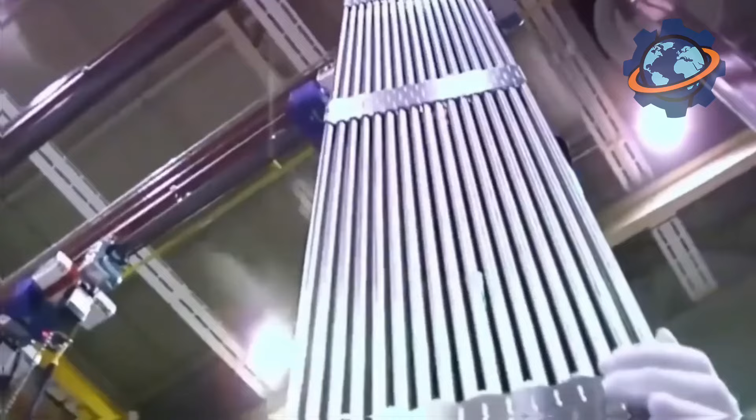Right then, the yellowcake has arrived, in drums, radioactive and dry as a desert wind. The next step, turn it into a gas. And not some lavender-scented air freshener, but uranium hexafluoride, the very same stuff from which the required isotope for reactors and other things is later separated. Let's cook, baby. The uranium concentrate is first dissolved in acid, purified, filtered from impurities, converted into uranium dioxide. And this is where the magic starts.

The uranium dioxide is treated with fluorine in special reactors at a temperature of 1,000 degrees. And as a result of the reaction, a volatile, transparent gas is formed, which boils at 133 degrees. The rest is mostly useless mass that doesn't work in a reactor. And to squeeze the required drop of energy from it, hundreds of tons have to be processed. That's why they say nuclear energy is quite the marathon.

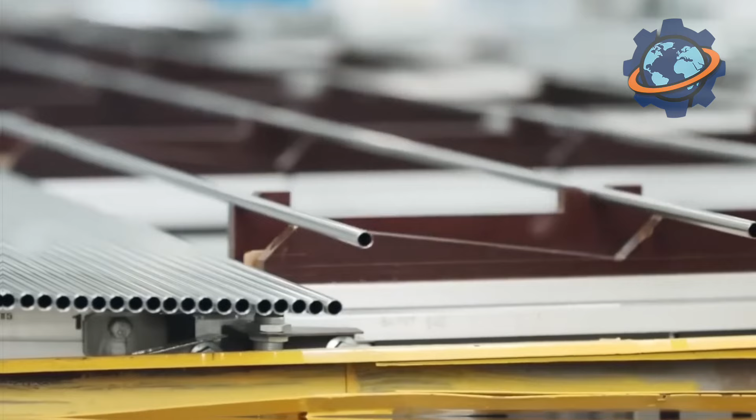After mining, the ore is crushed, milled, and thrown into a chemical bath. Acid or alkaline solutions are added, which extract the uranium like coffee from a filter. Then comes filtering, precipitation, and drying at 500 degrees. And what comes out is yellowcake, a yellow powdered concentrate. The official name is natural uranium concentrate, but everyone at the plants just calls it yellowcake.

It looks pretty, mustard-colored, fluffy, like a spicy powder for a Barbie. But God forbid you breathe it in or touch it. Alpha radiation, a long half-life, dangerous dust that gets into your lungs and settles there forever. It's handled only with respirators, suits, and behind 3 layers of glass shielding.

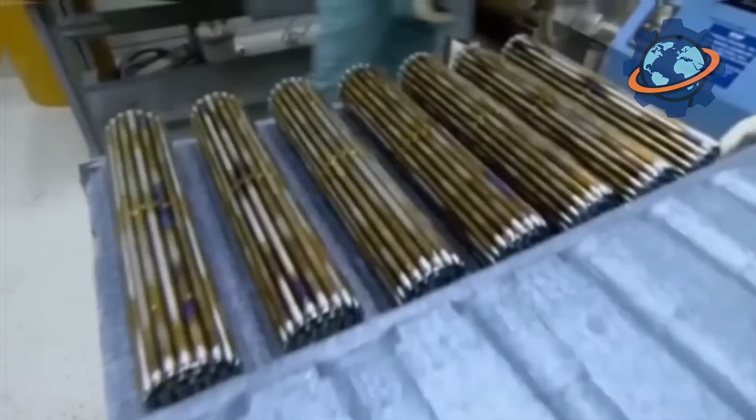It all starts in the dust. And that's not a figure of speech. Uranium ore is mined in hot, arid regions. Arizona, Wyoming, Texas, New Mexico. Think cowboy country, but instead of lassos, they have drill rigs, and instead of a sheriff, engineers in anti-radiation suits. The sun here is a scorcher, up to 100 degrees Fahrenheit in the shade if you can find any.

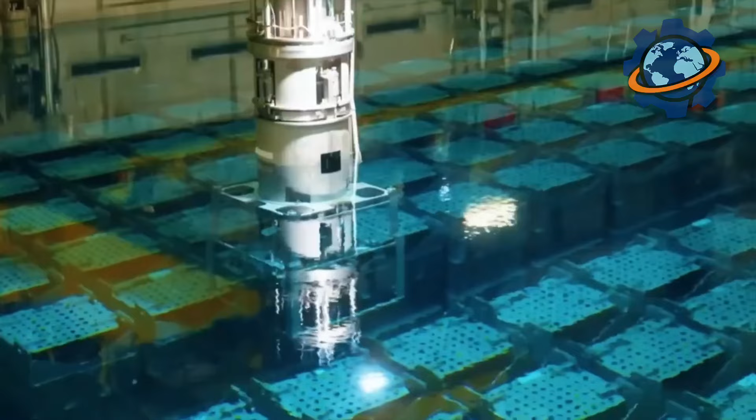There are 2 ways to get it. Open pit mining, where they strip the topsoil and haul the ore out with excavators, and underground mining, with explosives, lifts, and ventilation that howls like an old tractor. Then there's the in situ leaching method. Pipes are driven into the ground, special solutions are pumped in to dissolve the uranium straight from the rock, and then it's all pumped back out. All this ore, a gray-brown rock, looks no different from ordinary stone. But inside it, uranium-235 makes up only 0.7%.

What could be scarier than dust that glows with an invisible light? A rock that looks like ordinary gravel, but holds the fuel for power stations that light up megacities. So why is uranium called an energy marathon? Because to get just a few grains, you have to move hundreds of tons of earth, boil ore in acids, and turn it into a yellow powder that can kill with a single touch.

And this is where the real alchemy begins. Toxic dust becomes a gas, and that gas becomes energy. But there's a detail they don't talk about publicly, and you'll only find it out at the end of this video.

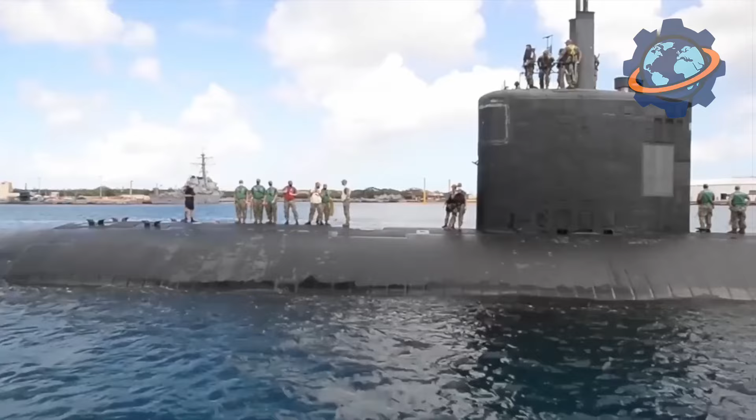Every year, dozens of nuclear submarines are launched into the world's waters, giants capable of diving to depths of over 2,000 feet and remaining invisible for months. These are truly underwater cities, with a reactor at their heart, hundreds of tons of steel and titanium alloy, and incredible silencing systems that absorb sound.

But how is such a machine born from cold metal? What secrets does its construction process hide, where even a microscopic crack can cost lives? Watch carefully. In the finale, you will learn what is usually hidden behind the 7 locks of military archives.

A nuclear submarine is a complex engineering creation, the development of which begins long before the first sheet of metal hits the machine tools. It all starts with computer-aided design. At this stage, several key parameters are considered: the size and shape of the hull, the power supply system, weaponry, and noise reduction measures. The length can range from approximately 300 to 560 feet depending on the class, and this directly affects the diving depth. The most advanced submarines can descend to 1,968 to 2,460 feet, and some experimental models, even over 3,000 feet.

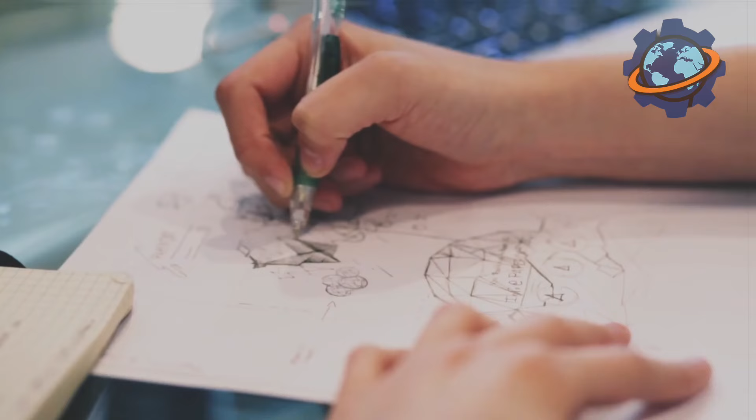Based on the initial designs, physical models of the submarine are created, which are tested in special water tunnels. This helps engineers see how the hull shape affects maneuverability, water resistance, and noise level. In parallel, computer modeling allows predicting how the submarine will behave underwater at different speeds and maneuvers. After simulations, when all calculations match up, the blueprints are sent to production. This is where the most interesting part begins: the actual assembly.

For the construction of nuclear submarines, special materials are used that can withstand high pressure at great depths and provide protection against corrosion. Usually, these are high-quality steel or titanium alloys. Steel is cheaper and easier to produce, and it withstands pressure and impacts well. Titanium has the advantage of high strength, lightness, corrosion resistance, and being non-magnetic, which makes it harder to detect the submarine. However, titanium is more difficult to process and weld, as its melting point is higher, about 3,092 degrees Fahrenheit, versus approximately 2,552 degrees Fahrenheit for steel. Before construction begins, the metal sheets undergo heat treatment. They are heated, rapidly cooled, and treated with special anti-corrosion compounds.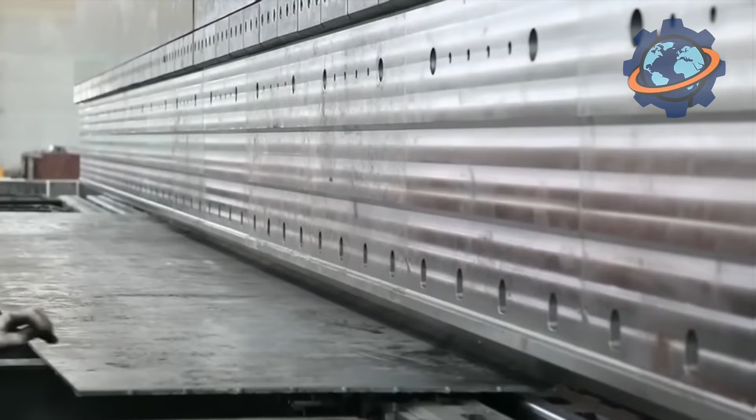The hull of a modern submarine is usually made of modular sections. This makes construction easier. Metal sheets are cut by giant laser and plasma devices with millimeter precision. Then, each sheet is bent under a press to give it the required shape. Often, some hull elements have a spherical or cylindrical structure. The sections are assembled separately. These are huge rings, or compartments, which are later joined in the final stage. This division into sections allows for working on different parts of the submarine in parallel, speeding up the construction process.

When all the parts are ready, one of the most critical stages begins: welding the hull. The welds must be extremely strong. Even a microscopic crack at depth can cause a catastrophe. Therefore, automated electron beam welding is used, which allows for creating the most uniform seams possible. Additionally, each seam is checked with ultrasonic scanners and X-rays.

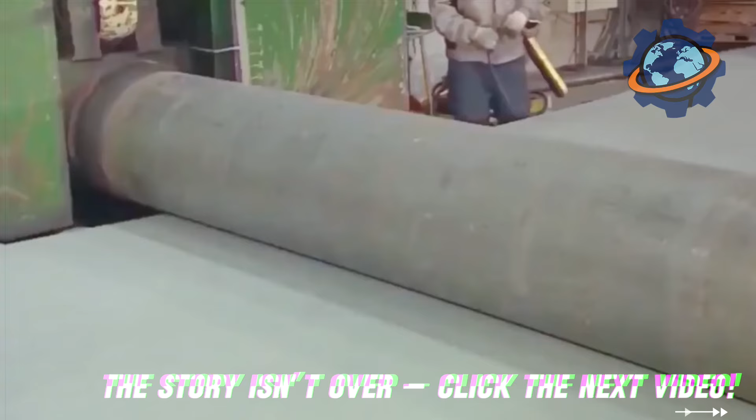Most nuclear submarines have a double hull. A strong inner hull withstands high pressure at great depth, while an outer hull provides a streamlined shape, improves hydrodynamics, and helps reduce the likelihood of detection. Ballast tanks, which regulate the submarine's buoyancy, are usually located between the hulls. To keep the submarine as stealthy as possible, it is covered with anechoic layers. These are polymer tiles that absorb sound waves, as well as composite materials with micropores that reduce the acoustic signature, and noise-dampening coatings applied to the propellers and power plants.

When all the hull sections are ready, their joining begins. Giant cranes move the compartments into special docks, where they are connected using bolted joints and welding. Next, the hull is tested for leaks by filling it with compressed air and checking for any escape. And strength tests are conducted in a hydrostatic tank, where pressure similar to deep sea diving conditions is simulated.

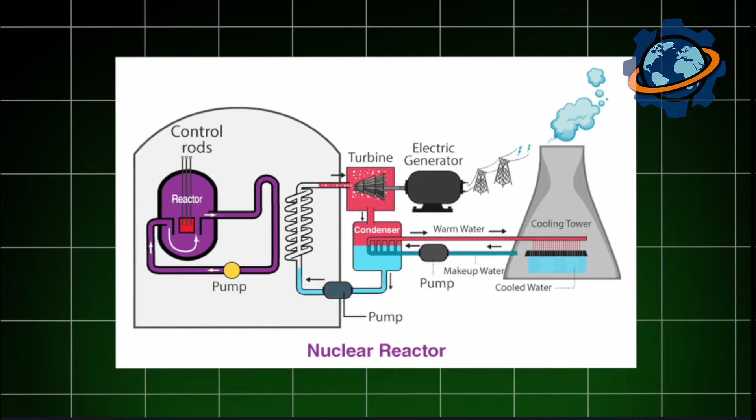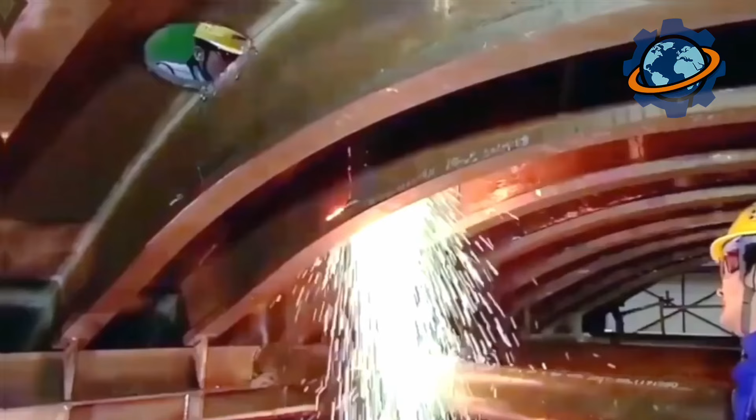The reactor is delivered in special protective containers and installed by a crane through an upper hatch in the hull. Inside, a compartment is provided for it, surrounded by materials that minimize radiation. Emergency cooling systems and sealed barriers are also located there. The reactor is mounted on a shock-absorbing platform that reduces vibrations and impacts during the submarine's movement. Then, heat exchangers and steam generators are installed, which are responsible for the circulation of the coolant, and turbines and electric generators are mounted. The functioning of all the submarine systems depends on their operation. Finally, the reactor compartment is sealed with multi-layered lead and composite panels to protect the crew from radiation.

To check the readiness of the structure, the first startup of the reactor is carried out in test mode. The power is gradually increased, the radiation level in the compartments is monitored, and the cooling systems are tested at maximum loads. When the reactor is already installed and the submarine has a fully formed hull, it is still not ready for service.

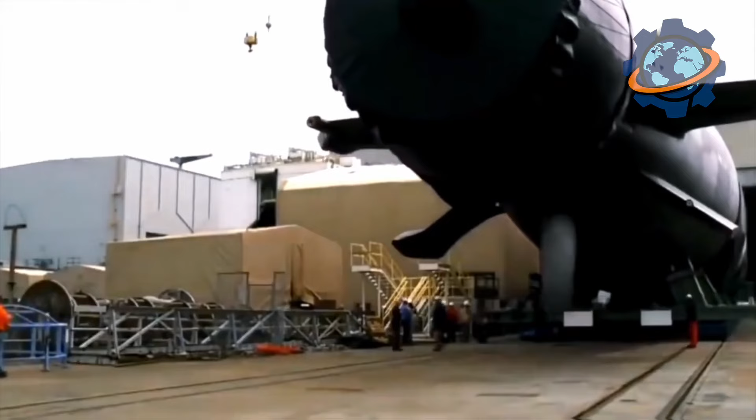Inside, there are still only empty corridors and compartments, so the next stage is the installation of control systems, life support, weaponry, and crew quarters. Sonar systems are mounted in the bow and along the hull. They track enemy ships and scan the seabed. A computer system and automated combat control stations are also installed, ensuring maneuvering accuracy.

Of course, weapon systems are also mounted. Torpedo tubes are located in the front part of the submarine, and they usually have automated reloading mechanisms for quick preparation of new shots. On strategic submarines, missile silos with hydraulic locks and pressure control systems are installed in the central part, which allow for launching missiles even at great depths.

Since the crew can spend months underwater, the submarine must be as autonomous as possible. For this, nuclear submarines are equipped with oxygen generation systems, carbon dioxide removal, heating, ventilation, and a sufficient supply of water. If you've seen capsule hotels, then inside a submarine, there is something similar: sleeping capsules for the crew to rest. In addition, there are dining areas with significant food supplies and a command center with control panels, maps, and communication equipment.

After arranging the living area, the submarine is almost ready to go to sea, but a series of complex tests are still ahead, which must prove that it can withstand colossal pressure, remain inconspicuous, and is maneuverable in extreme conditions and capable of performing combat missions. Such checks last from 6 months to 2 years and include both factory testing and combat training for the crew.

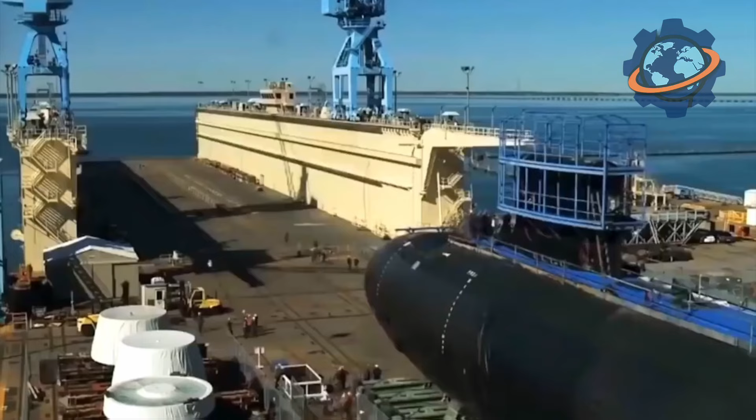First, the submarine is checked again for leaks. All electrical and navigation systems are tested, and the reactor is started up again. After this, the submarine goes to the open sea for the first time, where stabilizers, hydraulic cylinders, and steering mechanisms are checked. Sharp turns, dives, emergency maneuvers are practiced, and the maximum speed is determined, usually 25 to 35 knots, which is about 29 to 40 miles per hour.

Then the submarine descends to periscope depth, about 65 feet, to assess stability. At greater depths, the operation of the ballast tanks under load is checked, and the submarine is gradually brought to its maximum permissible depth, which is about 1,968 feet, depending on the class. The reactor is necessarily tested under maximum load.

In addition, the submarine enters a special zone with hydroacoustic sensors, where specialists measure the noise level at different speeds and check the effectiveness of the noise-dampening coating. Finally, the submarine undergoes a simulated combat mission, during which the crew demonstrates its readiness for real service.

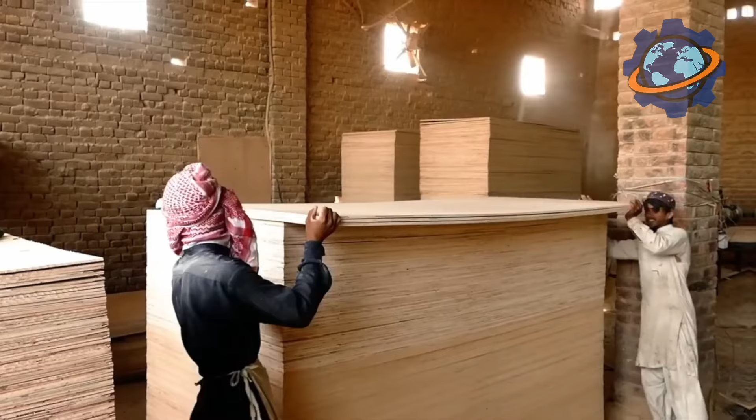Every year, over 150 million cubic meters of plywood are produced worldwide, a volume that could circle the Earth several times in train cars. But few people stop to think that behind this lies a unique technology where wood is literally unrolled into a continuous ribbon and then assembled into a super strong material that can withstand colossal loads.

How do ordinary logs, after spa treatments in giant pools and a dance with knives, turn into perfectly smooth sheets, ready to serve in furniture, ships, and even skyscrapers? Watch until the end, and you'll discover one hidden secret of this production that isn't talked about publicly.

It all starts in the forest, where the best specimens are selected for plywood production. You need perfectly straight, cylindrical trunks without a large number of knots or defects, preferably from birch, alder, pine, or other species. After being delivered to the factory, the logs go through the first and very important stage of preparation: hydrothermal treatment. They are submerged in giant pools of hot water, where they spend several hours, and sometimes up to a day.

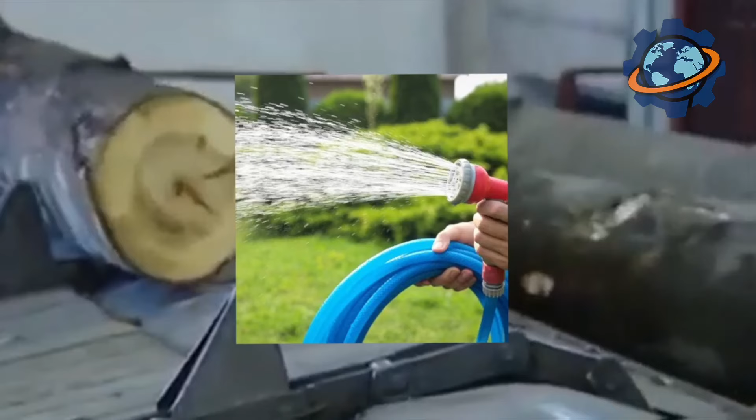This sort of spa for logs has a purely practical purpose. The hot water softens the wood, making it more plastic and pliable. Without this, further processing would be impossible, as cold wood would simply crumble and break. After their bath, the logs are fed to a line where their bark is stripped off. Special machines quickly and efficiently clean the trunk, leaving a smooth, light surface. Then the logs are sawn into standard lengths, ready for the main stage of transformation.

The heart of the entire plywood production process is the peeling lathe. This is where something incredible happens, something that contradicts our usual understanding of wood processing. The prepared log, clamped at both ends, begins to rotate at a huge speed around its axis. A long, razor-sharp knife, installed parallel to the axis of rotation, is slowly brought towards it.

As it cuts into the wood, it begins to peel off not shavings, but a continuous, seamless ribbon, just 1 or 2 millimeters thick. It's like unrolling a giant roll of paper towels. The machine literally unrolls the trunk, like a scroll of ancient papyrus, turning a 3-dimensional cylinder into a flat, long ribbon. This ribbon is called veneer.

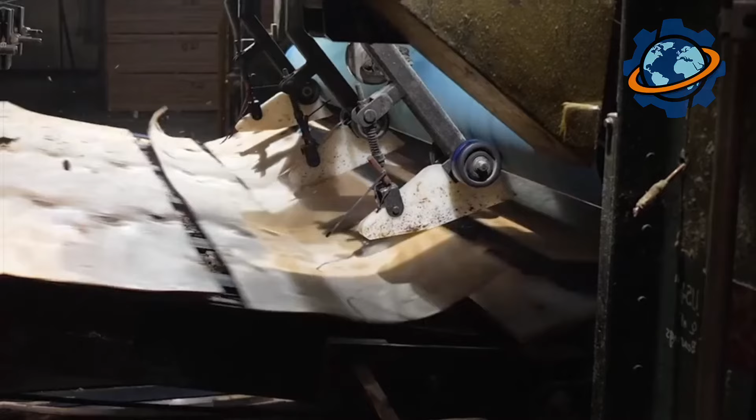The long sheet of veneer moves further down the conveyor, where giant clippers chop it into sheets of standard size. All that's left of the log is a thin central cylinder, the so-called pencil, which is then used for other purposes. Freshly made veneer contains a lot of moisture, which is an enemy of the strength and stability of the future plywood. Therefore, the next mandatory stage is drying.

The veneer sheets are fed into long, multi-tiered drying chambers. Inside them, as if on the shelves of a giant cabinet, the sheets slowly move on a conveyor, while hot air intensely blows on them from all sides. The temperature and speed of the air are strictly controlled to dry the veneer evenly and avoid cracking or warping. In a few minutes, the damp and flexible sheets turn into light, slightly brittle, and perfectly dry blanks, ready for gluing.

At this stage, the dried veneer sheets are sorted by quality. Then they pass through a glue spreading machine. Special rollers, dipped in a bath of synthetic glue, usually based on phenol formaldehyde or urea resins, apply a uniform, sticky film to one side of every other sheet. Next begins the process of forming the layup. A dry sheet of veneer is placed on a table. On top of it, a sheet coated with glue is placed.

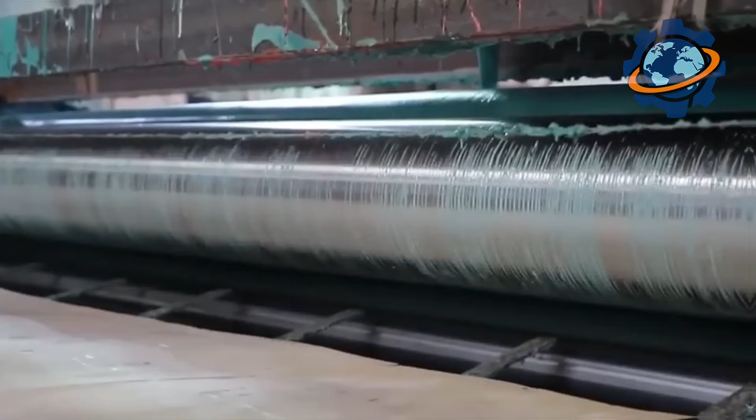And here lies the main secret. Each subsequent sheet of veneer is laid so that the direction of its grain is perpendicular to the previous one. If the first sheet's grain runs lengthwise, then the second's runs crosswise, the third's lengthwise again, and so on. This cross-grain structure is the key to plywood's strength. It paralyzes the wood's natural tendency to split along the grain and evenly distributes the load over the entire area of the sheet.

That's why plywood is equally strong in all directions. The number of layers in the layup is always odd, so that the structure is symmetrical, and the outer layers have the same grain direction. The formed layups of veneer are fed to the most powerful section of production, the hot press. This is a giant multi-level structure, between whose plates several dozen future plywood sheets are loaded simultaneously.

When the press is loaded, the plates begin to close. With an enormous force, reaching tens of kilograms per square centimeter, the plates compress the veneer layups, turning them into dense, thin blocks. At the same time, the plates are heated to a temperature of 302 degrees Fahrenheit. Under the influence of high pressure and temperature, the glue polymerizes, penetrating into the pores of the wood and permanently bonding the layers into a single, incredibly strong monolith. The pressing process lasts for several minutes, after which a finished plywood board is born.

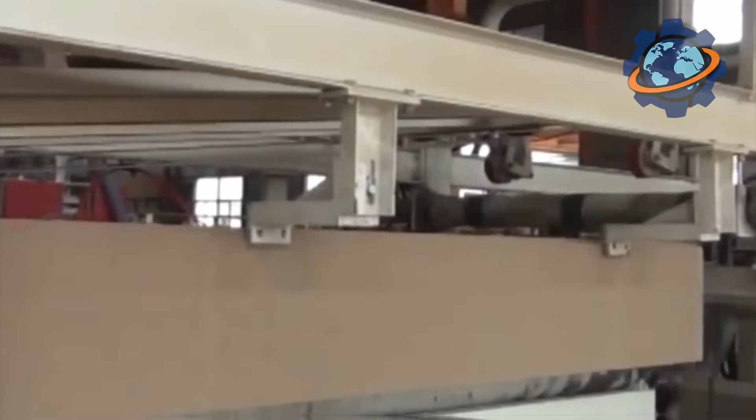Hot sheets of plywood come out from under the press and are stacked for gradual cooling. This is important to avoid internal stresses in the material. After cooling, the sheets undergo final processing. Powerful circular saws trim the edges, giving the sheets precise geometric dimensions. Then comes sanding. The sheets pass through sanding machines with endless abrasive belts, which make their surface perfectly smooth and even. After this, each sheet undergoes strict quality control.

Inspectors check it for defects, delaminations, knots, cracks, glue spots. Depending on the surface quality, the plywood is assigned a certain grade, and a corresponding marking is applied to it. The finished, sorted, and packaged stacks of plywood are sent to the warehouse, to later become part of furniture, houses, ships, and countless other structures, demonstrating to the whole world how human intellect can improve upon nature itself.

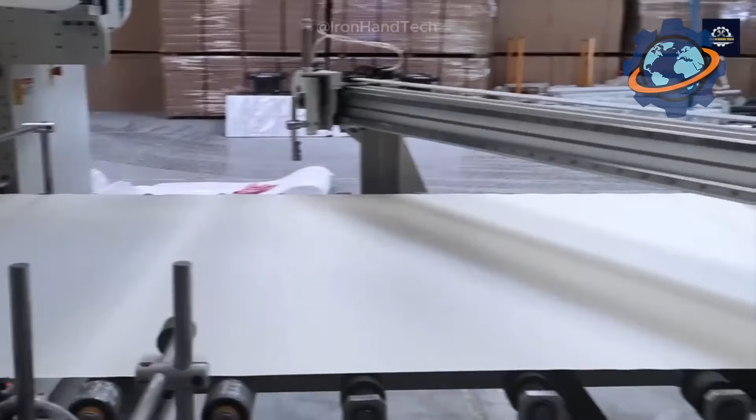The global scale of production is also impressive. Annually, over 150 million cubic meters of plywood are produced worldwide. If you were to load all of this quantity into railway cars, the resulting train would circle our planet at the equator several times. The pencil that remains after peeling the veneer is a vivid example of how modern production strives for maximum waste-free efficiency. It is not waste, but a valuable raw material for which there are several clearly defined paths. Its future fate depends on the thickness and quality of the wood.

If the cylinder is massive enough, it is sent to a sawing line, where it gets a second life in the form of lumber. Small boards and bars are cut from it, which are ideal for creating the invisible but strong frames for sofas and armchairs, legs for chairs, elements of children's beds, or wooden pallets.